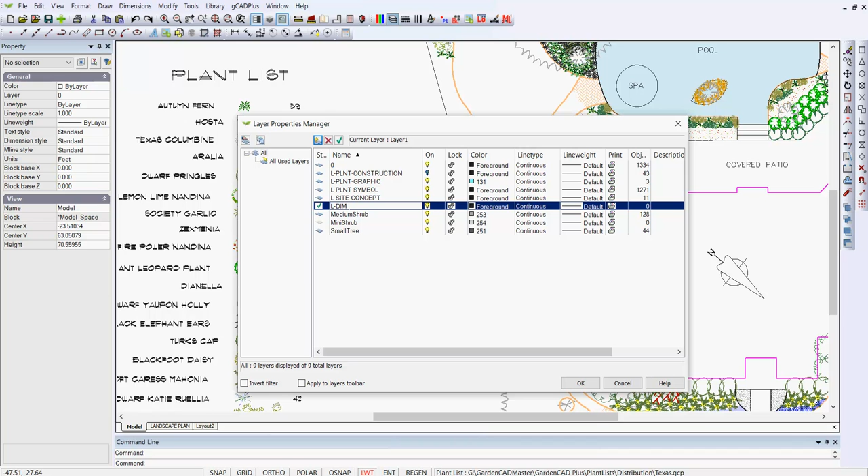Well, let's add some dimensioning to this design. I think it's a good idea to create a special layer for dimensioning. We're in the habit of calling that L-dim. If you precede any layer name with an L, you're clearly working on a landscape layer, and if your design has to be passed to others, they're clear that you created that layer as a landscape designer. So we've created a layer L-dim, and it's the current layer.

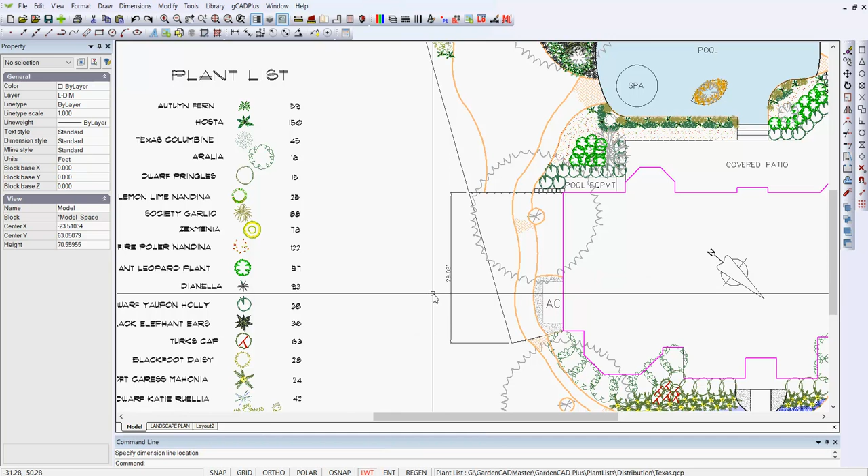The most common form of dimensioning would be a linear dimension. So I'd put a dimension from that point to that point in this area, but that dimension I don't think suits. We want an aligned dimension, so let's get rid of this one and pick the next option. I could have OSnap on, but I'll just make the individual selection of the end option. And there, the distance - this is a US design - is 30.24 feet as an aligned dimension.

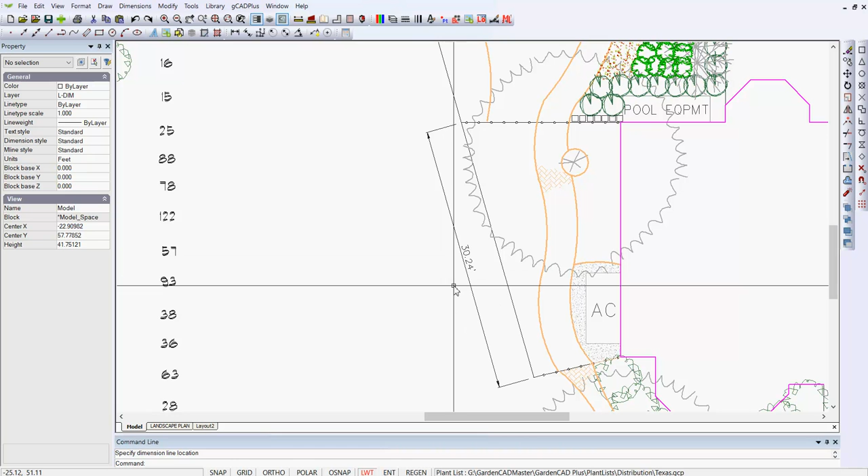Now you might well want to give your construction team that distance in feet and inches. They may have trouble with the decimal feet notation, and to do that it's dimension and dimension styles - we're modifying the standard dimension style here. When we go to units, we'll change the precision to a single decimal place. We can leave the period as the decimal separator, and for the measurement scale we'll change that to 12, because there are 12 inches in a foot.

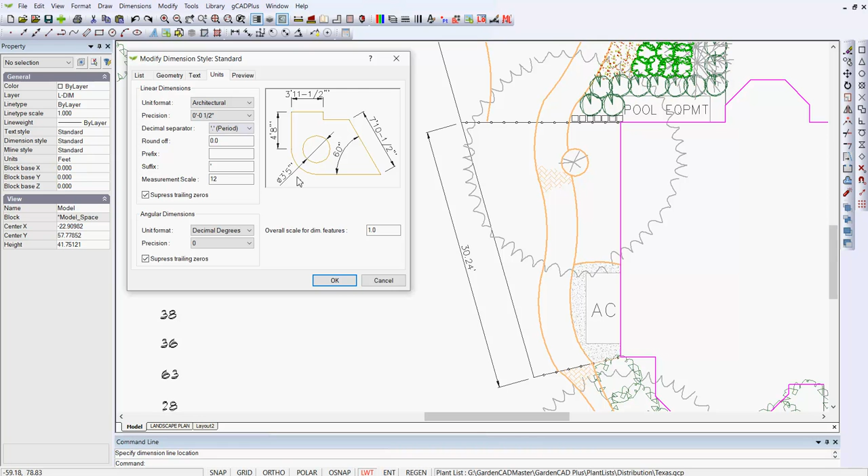But if we change this one to architectural now, you can see in the preview box what we're going to get, so we can OK it, and the dimension changes.

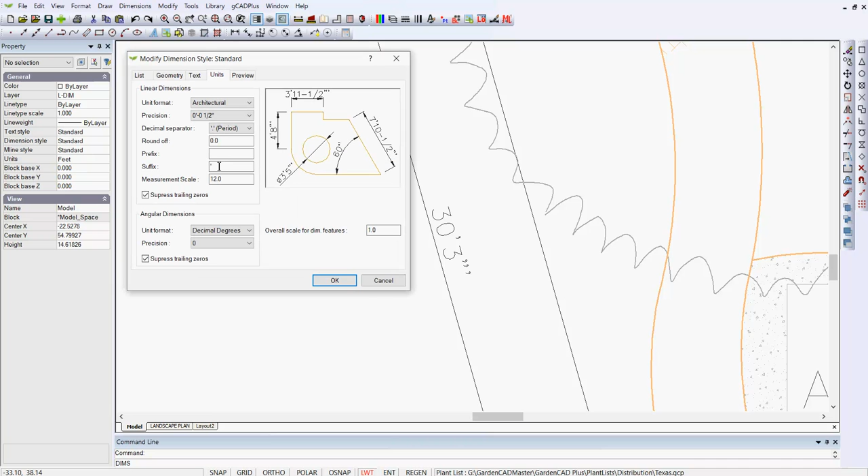Well, there's still one final adjustment to make. As I zoom in here, we've got 30 feet 3 inches, but we've got an extra suffix there. The symbol for feet in the US is just a single quote. So if we go back to dimension style, you can see here I've got the suffix left in there as a single quote. So if I take that out, the landscape construction team can clearly read that the distance at an angle along that boundary is 30 feet 3 inches.